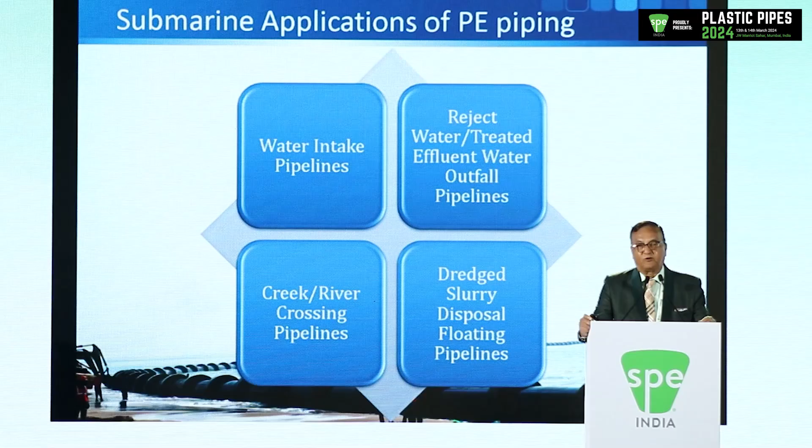Let me begin the presentation. Before we go to the challenges, let us quickly see the applications for which HDPE pipes are popularly used. The most popular application in India is water intake pipelines, mainly for desalination projects, where raw sea water is drawn from the deep sea through a pipe. The second application is reject water and treated effluent pipelines. Reject water is generated from the desalination process, in which about 40% of water is converted to potable water and the rest 60% becomes highly saline water which needs to be disposed of like a treated effluent. Treated effluents from industries, industrial parks, or industrial estates, and outfall pipelines, have been made more or less compulsory for these sectors. So HDPE pipe is very popular for such applications.

I remember in 1985 to 87, when I was working for Polyolefins, we did some demonstrations and held workshops for crossing rivers and creeks in the Kerala region. Everybody knows Kerala is infested with backwaters, so any water supply trunk main traveling through has to cross 2 or 3 water bodies. We had advocated the use of HDPE pipes there for creek crossing and backwater crossing. I'm happy to say that now there are almost 25 such installations where they have avoided construction of a pipeline bridge and instead gone below the creek bed using HDPE pipe.

A very unique application is dredge slurry disposal pipeline. We all know that when a port is developed or in operation, it requires maintenance dredging, where soil from the port area is removed and disposed of in the deep sea. HDPE pipes, being very flexible, elastic and light, serve a very good purpose in dredging operations. They lay about one or two kilometers of HDPE floating pipe to dispose of sand or silt from the port area to the deep sea.

Before we come to the challenges, let us see the overall key requirements of a typical submarine application project. Firstly, we have to see the overall feasibility and go for selection of material. Although in 90% of submarine installations HDPE pipes are used, some applications may not recommend use of HDPE pipe. The most important thing is reconnaissance, survey and assessment of marine conditions and site conditions.

This is the very essential requirement of a submarine project. Third and very important is addressing the local habitat issues. Almost 70% of the pipelines I have done had objections from local habitats, mostly fishermen. They have a common grudge against any pipeline going into the sea, that it will kill the fish and they will lose their livelihood. I have seen projects stalled for more than two or three years because fishermen did not permit the installation. So it is very important that before you start the project, you initiate the client to settle with the local habitat so there are no problems during the installation process.

Pipeline stability arrangement, which I will come to later in the technical section. Near-shore leveling of the intake pipe is also covered later on, and dredging for the pipe trench is also covered later on. Fabrication and assembly of the pipeline is site specific. Not everywhere do we do the pre-assembly of the pipelines, but it is site specific.

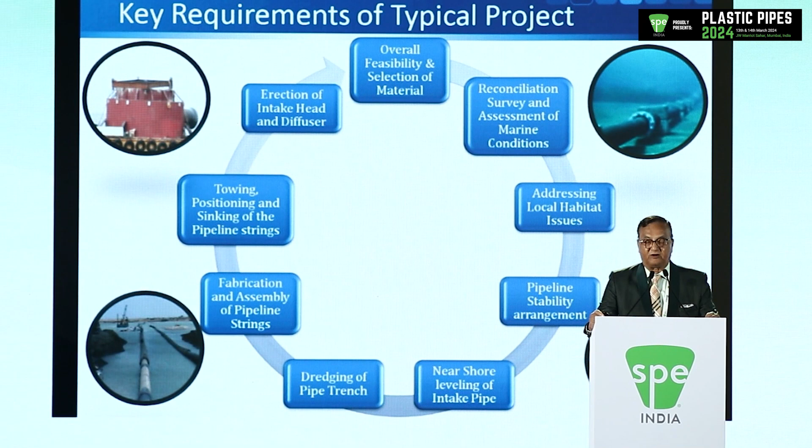For a float and sink method, towing, positioning and sinking of the pipeline is one very important part of the whole process. When we go for seawater intake systems, we have to install a seawater intake head at the end of the pipeline so that sediment-free water can travel into the pipeline. For a reject water or effluent disposal pipeline, there is a diffuser which diffuses the fluid into multiple streams to get proper dilution and dispersion.

Now, we are all here to discuss polyethylene, and I am proud to say more than 90% of submarine installations use HDPE. Why? Because of its specific properties. One is excellent flow characteristics, and added to it, there is high resistance to scaling for HDPE pipes. So for submarine applications where the chances of scaling are very high, HDPE pipes are more suitable.

Resistant to seabed changes. The seabed keeps changing every season, sometimes getting filled with sand, sometimes getting eroded. HDPE pipe can easily adapt to such changes. There is no free spanning of HDPE pipe; its elasticity permits it to change with the seabed very quickly.

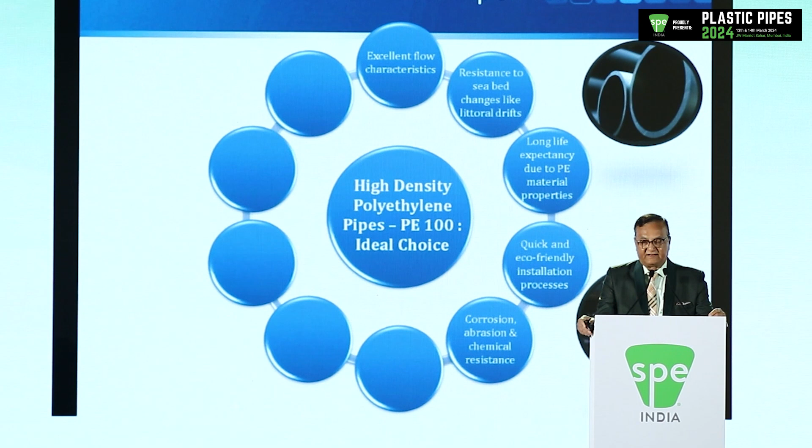Long life expectancy, because PE is immune to seawater corrosion, so it lives its complete life without any hassles. Quick and eco-friendly installations, since it doesn't require too many barges and cranes for installation. Corrosion, abrasion and chemical resistance, as I already mentioned. Life cycle expectancy is normally its designed life of 50 years, because it has no effect from seawater on its material. It gives the lowest unit delivered cost of water because of high flow characteristics.

We have heard the problems of metallic pipes. Mr. Salvi has very elaborately shown, as they say a thousand words for a photograph, and we have seen the photographs of what condition the pipes were in. This doesn't happen with HDPE pipe.

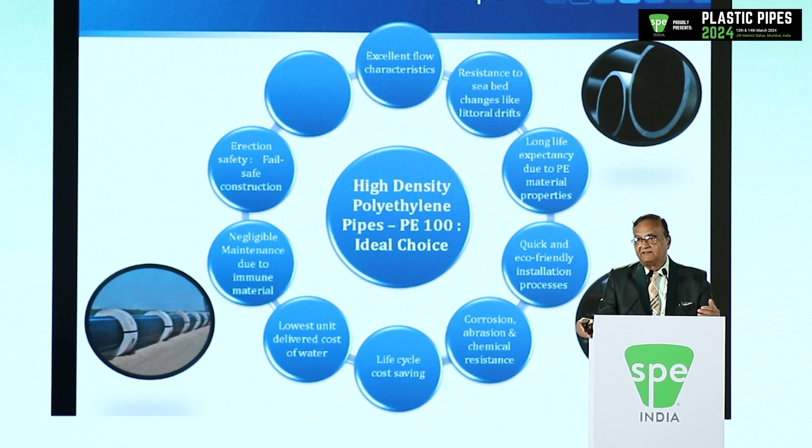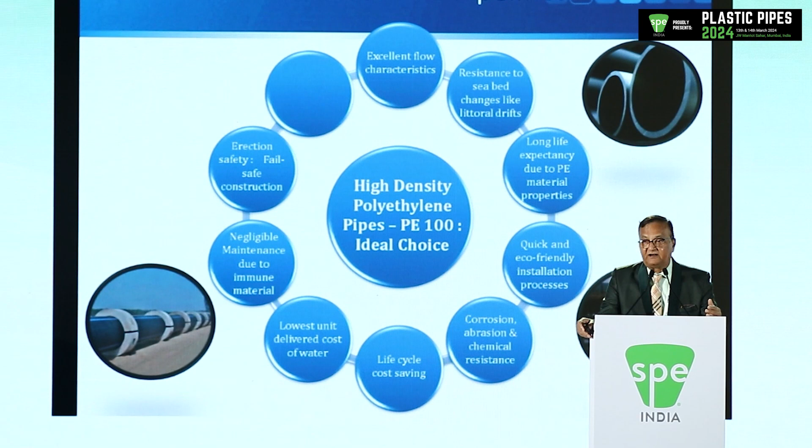The HDPE pipe erection process is fail-safe. I don't have time to explain it in detail, but if something goes wrong, you can always retract, like an army retracts when they think they will lose if they keep fighting. They retract a few steps and fight again. That way, even if there's a problem and you feel the operation should be abandoned, it's possible to retract the pipe and relay it again in the next available tide.

There was a time when this technology was not available in India, but for more than three decades now, we have indigenous construction technology available, and I am part of it. There are a few more agencies who can successfully carry out HDPE pipe submarine installation.

As I said, reconnaissance, survey and assessment of marine conditions is a very important factor, or challenge, before you plan any submarine project. The reconnaissance survey is basically a seabed survey and a seismic survey which classifies the soil on the seabed. That tells you what kind of installation methodology you have to adopt.

If it is a sandy soil, a pure smooth sand soil, then the HDPE pipes have a tendency of self-burial. Even after a couple of years, the pipe will go under the sand and be buried on its own. So in such cases, dredging is not necessary.

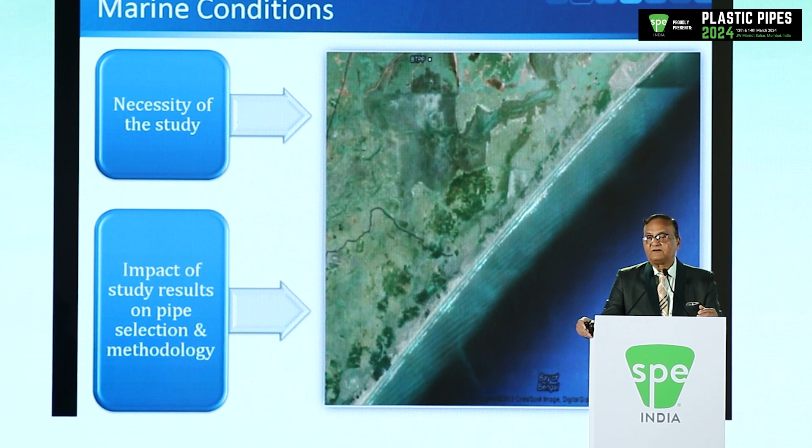But if the seismic analysis shows that it is full of rock, then a different design approach is needed. Either you spend a lot of money dredging the rock, or you ballast the pipeline in such a fashion that it can withstand the sea currents. Based on the impact of these studies, we had to design the piping system and the installation method.

Now I said we will talk about pipeline stability. HDPE pipes are lighter than water, so we need to weigh them down before putting them on the sea floor or under the seabed. For sinking the pipeline to the bed, we need concrete collars. A typical picture is being shown here.

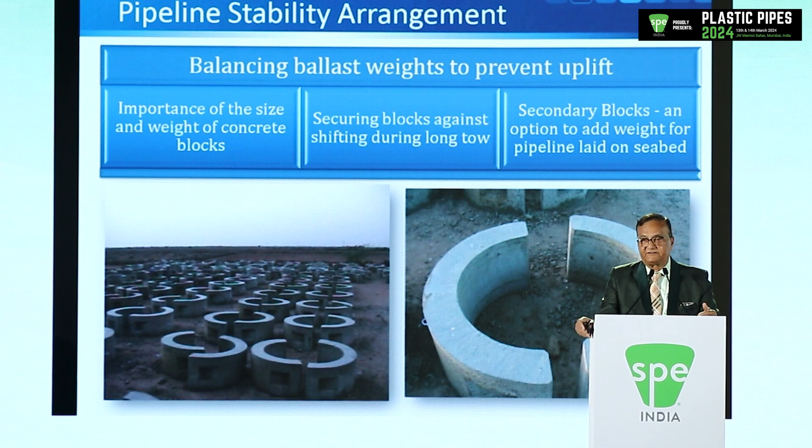They are very firmly bolted, because during the installation process there's a possibility that the blocks will slide and come together, causing an accidental sinking. So it has to be very securely fixed onto the pipeline. As I said, when the pipelines are laid on the sea floor, if required, we have to put secondary weights so that it can withstand the sea currents.

For seawater intake pipelines, the biggest challenge is leveling the pipe on the shore. When it comes near shore, in the intertidal zone, the seawater has to flow from the sea into the seawater pump house on the shore, mostly by gravity. So we have to maintain a gradient in the pipeline so that water can positively flow into the pump house or sump at all times, during all tides, even the astronomically lowest low tide.

The excavation depth goes up to 10 to 12 meters in some cases, where the ground is at a higher level than the sea. Normally it is more than 3 meters always, otherwise it will get merged into the sea. But sometimes it is 5 meters, 7 meters, and then we have to do a very deep excavation in the near shore area so that the pipe can come in at a proper gradient.

For this, you cannot do an open cut excavation of 12-meter depth, because your top width will be around 60 meters or so, and it is not normally permitted by the fishermen because their local, normal movement is affected. So we had to go with a sheet pile enclosure and a sheet pile cofferdam so that the excavation and installation can be done peacefully.

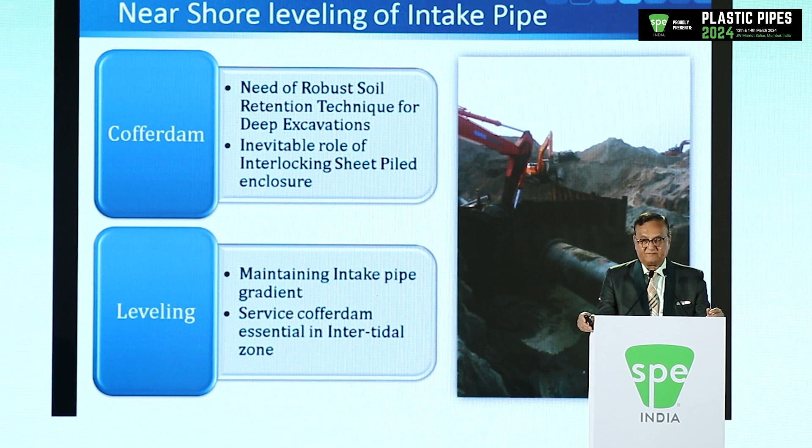Dredging of pipe trench: for many cases, the Environment Ministry is making it compulsory to dredge the trench, because a pipe lying on the surface creates problems with the fishermen's habitat—their nets get tangled and damaged. So based on the seismic analysis of the area, we had to plan whether to go with an excavator-mounted pontoon, a cutter suction dredger, or a grab crane barge. All these method selections are done after the seismic analysis.

Trench bed preparation: actually, HDPE pipe doesn't require trench bed preparation because you don't need to put a bedding or a mattress below the HDPE pipe. It can safely be put on sandy or clay soil.

Now the installation techniques, fabrication and assembly. This is one typical photograph of beach launching of the HDPE pipe for float and sink method. But there are other methods also.

During the initial survey, we had to find out whether there is a clean beach available for fabrication of the pipe string of about 500 to 600 meter length. If that beach is available, then we can go for float and sink method, shown over here. Otherwise, there are possibilities that you can have a port nearby, and that port permits you to fabricate the pipeline in the port, then bring it to the site of installation.

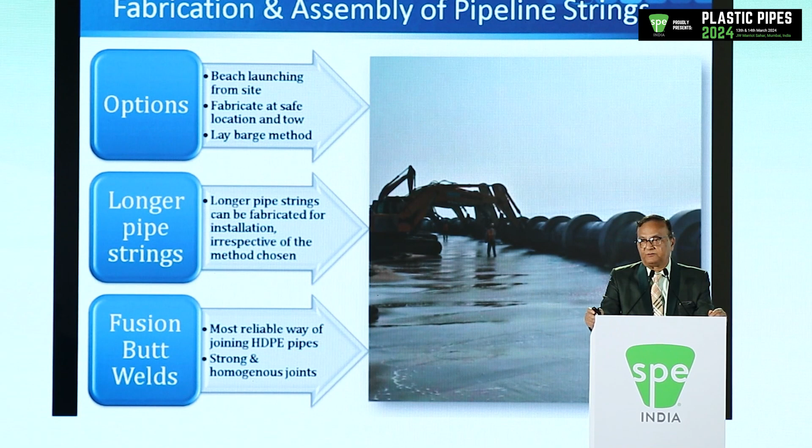If both these things are not possible, we have to go with a lay barge method, where the pipe is welded on the barge itself and then sunk from the barge. We can have longer pipe strings, up to 500, 700 meters, in the beach launching option. The most essential thing there is weld quality, because the pipe undergoes high stresses during beach launching and the welds must withstand it.

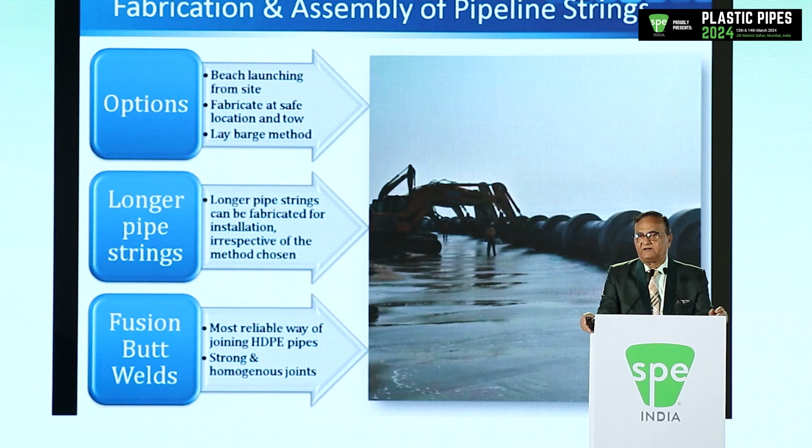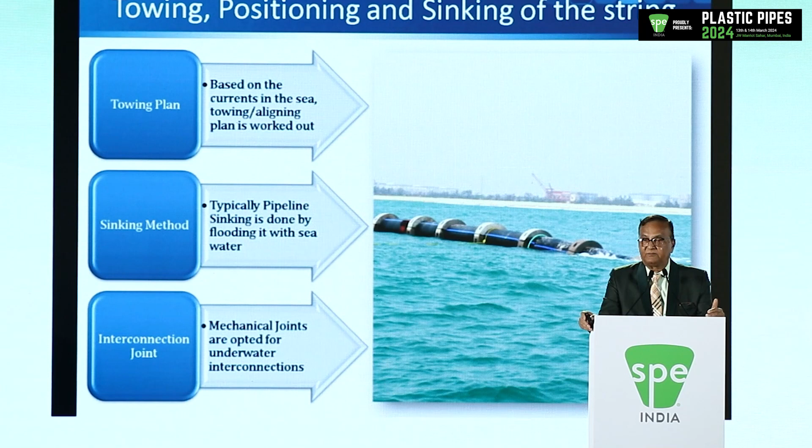The current equipment available is very good in giving sustainable welding. For towing, positioning and sinking of the pipeline in beach launch method, we had to make the towing plan considering the currents in the sea, and sinking is normally done by flooding seawater into the pipe. If you are going for multiple strings, you need to have a mechanical joint in between.

Now to understand how installation is done, I will present you a real-time video. This is from a recent site for Aurobindo group of companies. They are putting up a desalination plant, and we have done seawater intake pipeline for them. For everyone to understand, I will just play the video. It is about 3 minutes. May I request to play the video, please?

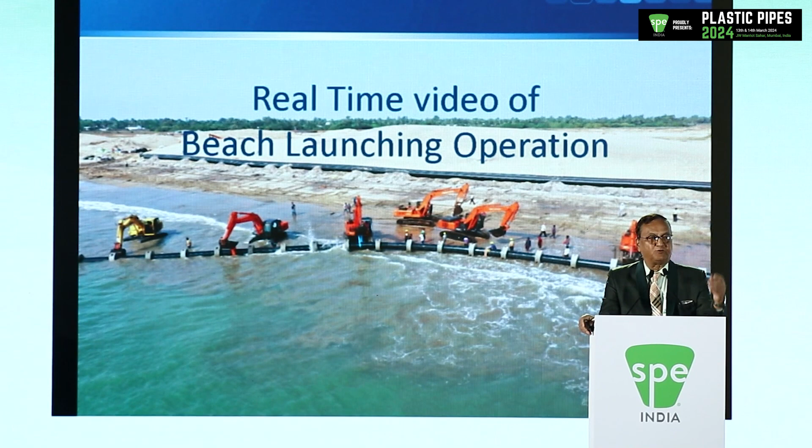This is typical beach launching. Now the pipe is fabricated on the beach. It will be pushed into the sea using this equipment, and as you will see in the next video, there will be a tug which will pull the pipe into the sea.

You can see about 5 excavator cranes pushing the pipe in the water. We use this because it has very quick movement. These machines can move very quickly. Secondly, they can go into about 1 meter water depth, where we need to float the pipeline, so they can go into that depth and put the pipe.

Now this first machine, which has pushed the pipe, that pipe has started floating. So gradually the entire pipe length, this is a 600-meter long string, will be pushed and then floated and taken into the sea. This looks like a simple operation, but this is the biggest challenge of the float and sink method: to synchronize the tug pull and the shore push.

These two things have to synchronize. The shore push cannot push too much, and the tug cannot put the full force unless the pipeline is floating. Now this is the tug which is pulling the pipe into the sea. We have to have a very long rope, almost 300 to 400 meters long, that we have to put.

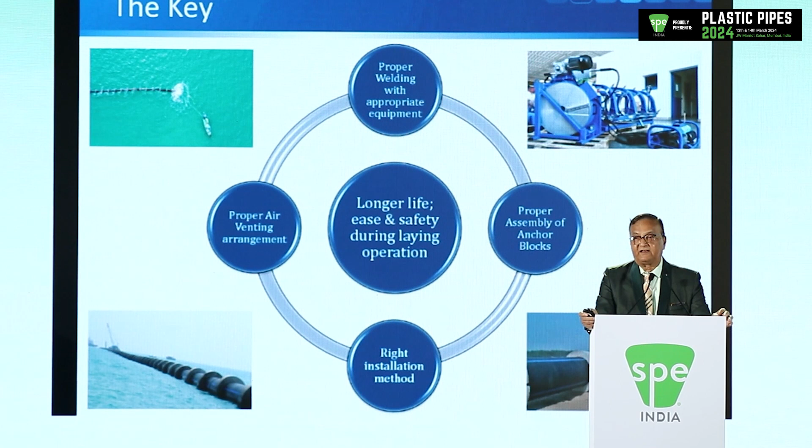Now, what is the key to a successful submarine project? Proper welding, use of state-of-the-art equipment, proper assembly of anchor blocks, right installation method derived after study of the ocean, and proper air venting at the shore. That is very essential.

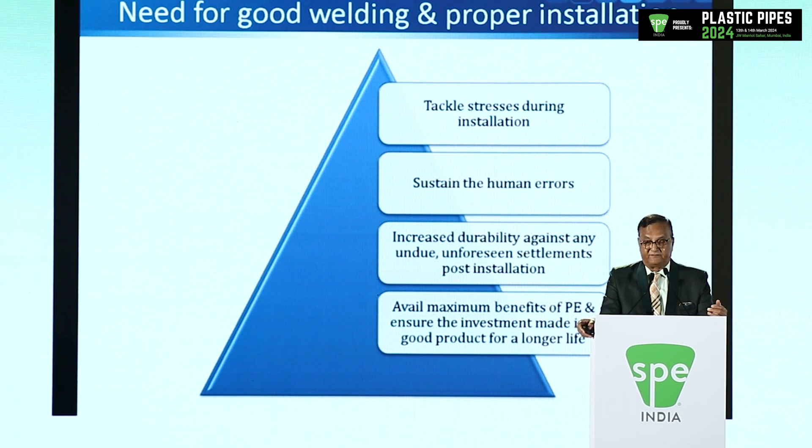Need for good welding - it has to tackle a lot of stresses. The welding should be such that it should sustain some human error if it happens, increase durability, and allow the client to avail the maximum benefits of polyethylene, which we proclaim.

I'll come to the key projects which we had done. 1200 mm into 3 pipelines for Nuclear Power Corporation. It's something new Nuclear Power Corporation has done - for the first time, they have gone with a piped water intake system.

This is from a river. Otherwise, they always go with open channels, Nuclear Power Corporations. Many power plants are there, and most of them are with open channels. But for the first time they have gone with piped, after a lot of convincing and a lot of marketing.

We have done a very long offshore pipeline, 1000 mm by 7100 meters, into the Arabian Sea at Nawapur coast. Friends, this happens to be the longest HDPE submarine pipeline laid in this country. Then we had done a 1600 mm diameter pipeline, which was at that time the largest diameter manufactured in our country.

We had done the Minjur desalination plant, and we had done some fast track projects. Only because it was HDPE could we do fast track projects. I will come to that.

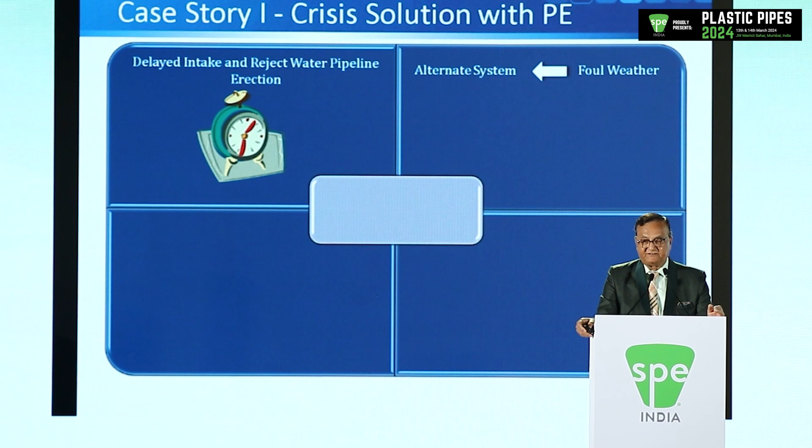So this is one of the fast track projects - this project is at Minjur. Their installation of the seawater intake pipeline, main seawater intake pipeline, was delayed for some administrative reasons. We were called upon, and it was foul weather - it was August-September month, which is foul weather in the Bay of Bengal.

So we said that we can lay 5 smaller pipelines, not 1 big pipeline, in the given time frame of 60 days. So we suggested 560 mm into 5 lines.

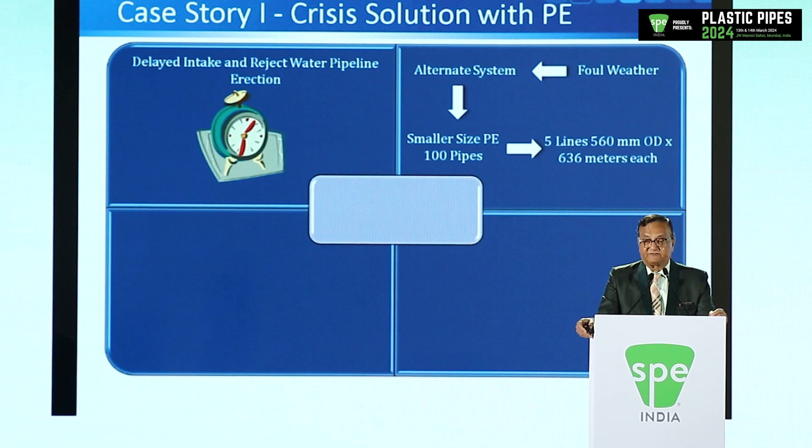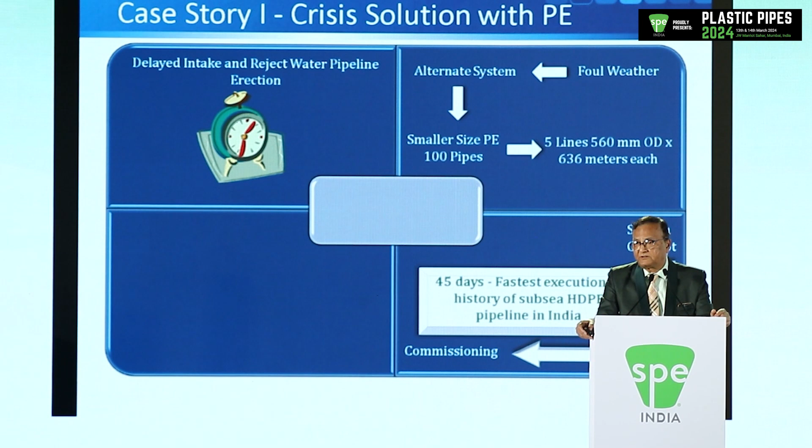System concept to commissioning was done in just 45 days. 5 lines of 636 meters each were laid in just 45 days. This was possible only because of HDPE pipes - no other pipe can be installed so fast.

And then when the foul weather receded, subsequently we also laid the 1600 mm diameter pipelines for intake and outfall. The plant has been commissioned and is operating, supplying 100 MLD water to Chennai.

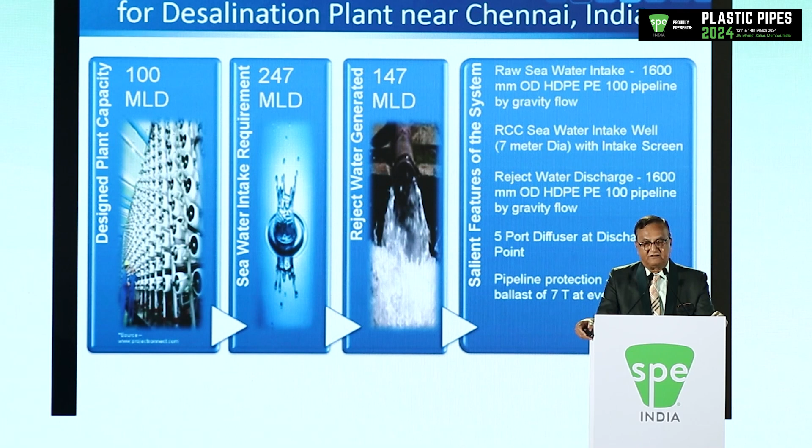This is the same case story, 1600 mm diameter pipeline for intake and 1600 mm for outfall, which was done in the fair weather season.

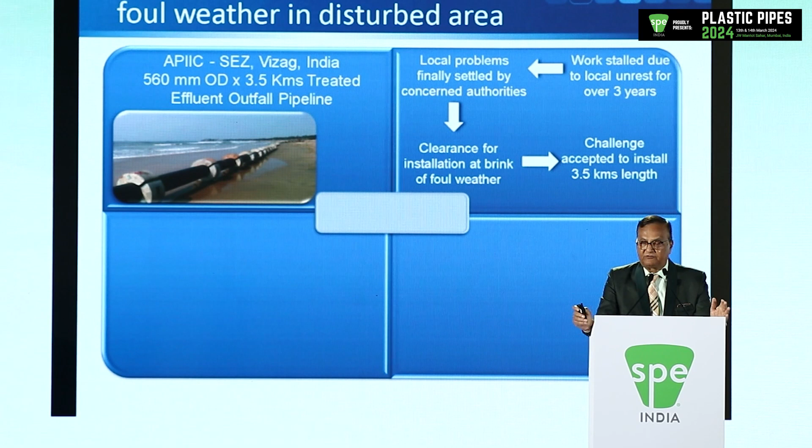This is the project where I said there was a local habitat problem. This project was held up for 3 years. We were not allowed to work by the fishermen, and they could get to violence also in that. So we couldn't venture onto the thing.

But finally they settled with the habitat, and we got the clearance at the beginning of March, which is the beginning of the foul weather.

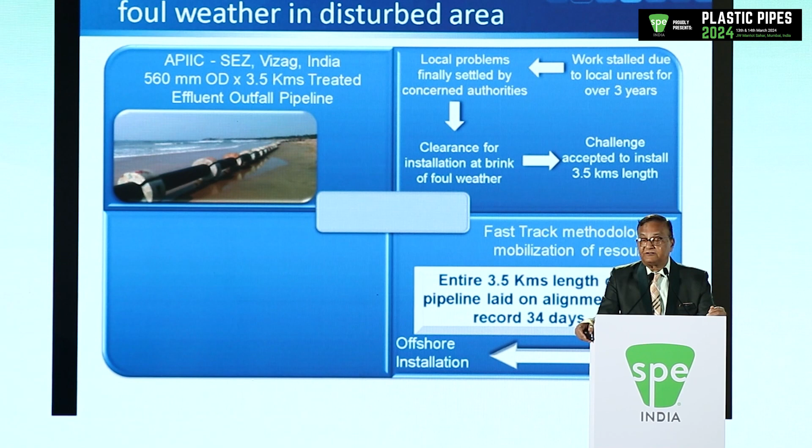We had the confidence of the previous fast track project, and we knew that HDPE pipe could be done in this timeframe. This was a 3.5 kilometer long pipeline, and we had done it in a record time of just 34 days. Of course, our preparations were ready because they were done outside, but on-site fabrication, towing, aligning and sinking was done in just 34 days.

This is probably the fastest track project done in our country. Laying a 3.5 kilometer length in 34 days is a Herculean task.

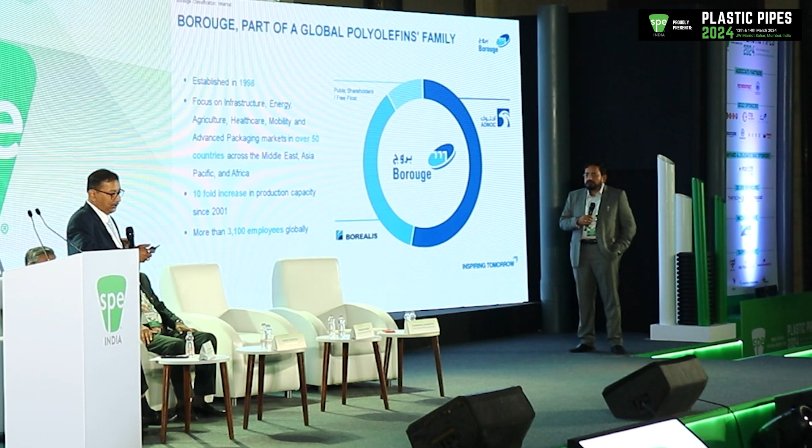Borouge is a leading petrochemical company, as most of you may be knowing, which provides innovative and differentiated polyolefin solutions, established in 1998. Pipe is one of our product lines, but we also focus on energy - that is wire and cable, agriculture, healthcare, mobility, and advanced packaging - in over 50 countries across Middle East, Asia Pacific, and Africa. There's been a tenfold increase in production capacity since 2001. Currently it's 50 lakh tons of polymers in one single location, going to be increased to 64 lakh tons by 2027, and we have more than 3,100 employees globally.

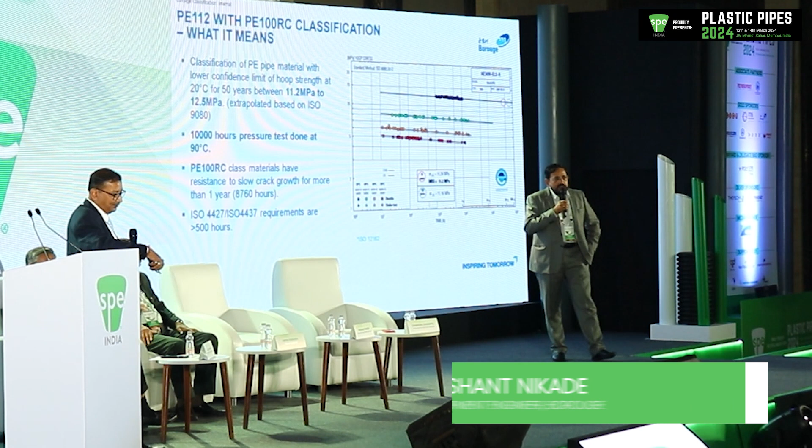Now, again coming back to Sholay - you know, it was another movie where the hero is asking his brother, who is an underworld don while the brother is a policeman: 'I have a bungalow, I have a car, I have a bank balance, what do you have?' So I often ask Prashant: the industry has PE63, PE80, PE100 - what new do you have? And what Prashant says is this: I have MRS 11.2 material. So this was the story we started, moving from 1960 to 2020. It was a PE100, and we have a PE100 stress crack resistance material, and then we have RC, and then we also have MRS 11.2 material. So things are moving, and when we say MRS, what exactly does it mean?

So the people from the industry, Nisha covered that topic, but let me explain. When you classify, it's not like within 1 month the exercise will be done. It's a 10,000 hour test, 132 samples of 32mm tested at various stress levels and temperatures, and then you have a regression graph, which we call the MRS graph. It's not easy - failures honestly happen, and as Nisha said last time, at the last moment it will fail sometime.

What we can see here is a classification where the top is at 20 degrees centigrade, but earlier it was done at 65 and 80 degrees. Here we can see that for the 50 years life, which is a requirement of ISO 9080, we are talking about 11.2 to 12.5 extrapolated based on this. But you can also see that we are talking about 100 years very comfortably - if you see these points, we are talking about 100 years.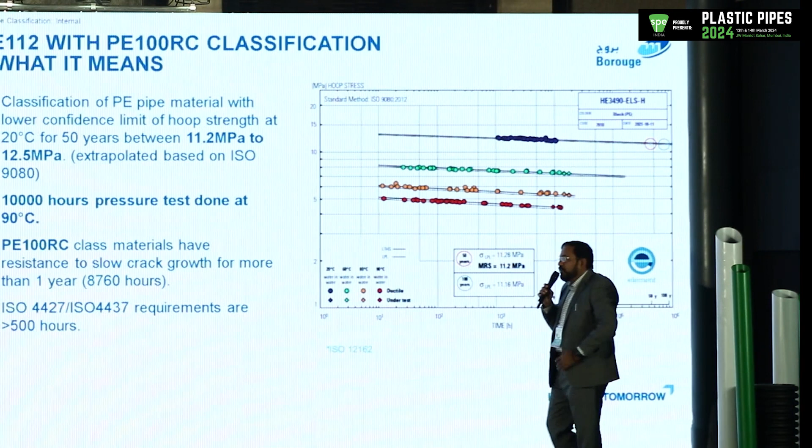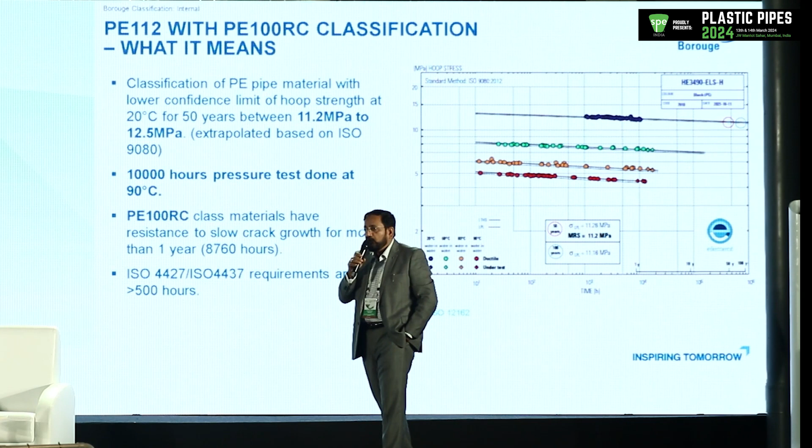So it's wonderful that we are not just talking about the topic of the presentation. The theme was sustainability - we are going over and above, talking about 100 years of life. So for the next generation, we are probably giving a better, far superior material.

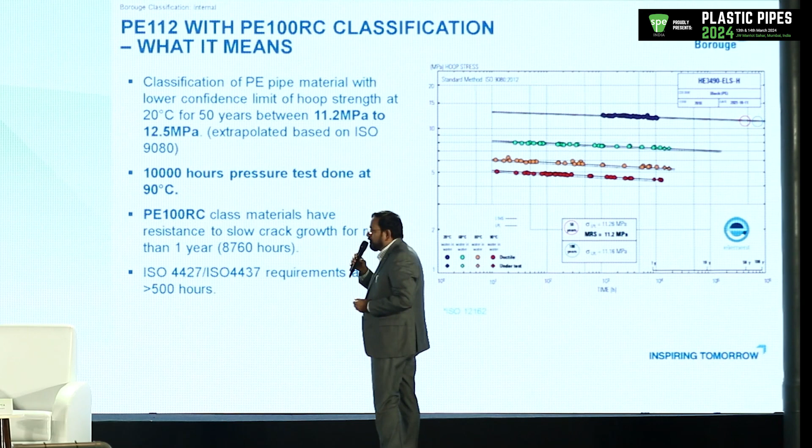There is also a requirement in 9080 that the material should not break - there should be no early failure. Apart from the long term, there should be no failure after 5,000 hours at 80 degrees. So we raised the bar, and as Nisha said last time, the complete properties have been lifted. We are talking about 90 degree centigrade, not 80, for 10,000 hours. So much better is the classification, better material.

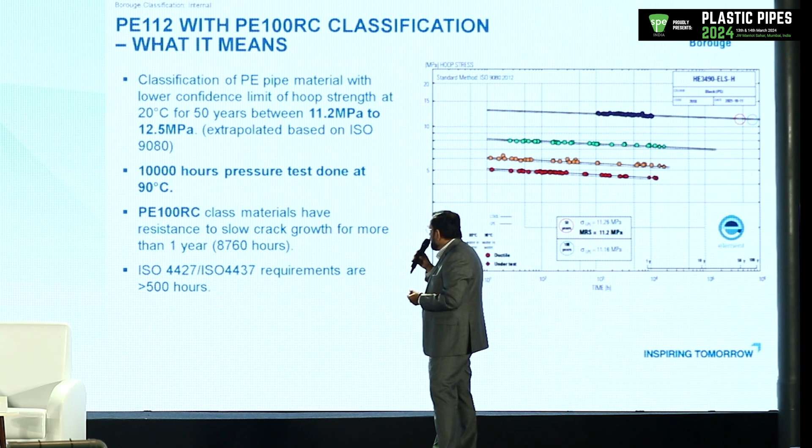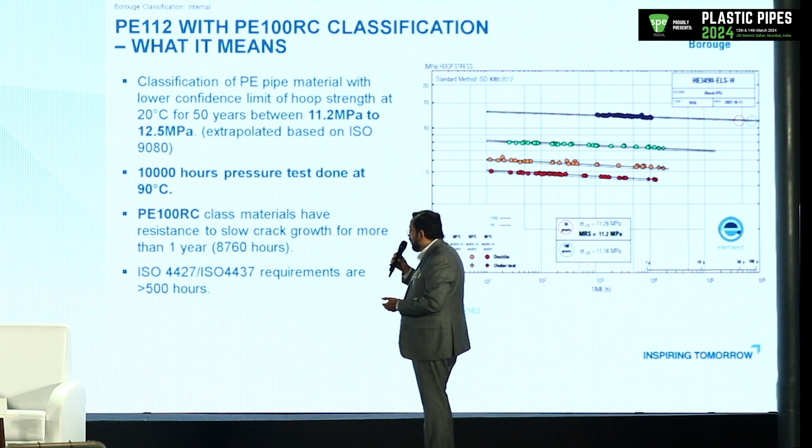Then we have RC, that is resistance to cracking. Now we have seen the installation practices, we have seen a video, you must be imagining what stress levels the pipe will have gone through. So these are the things, and we are even talking about slow crack growth of 8,760 hours, a complete 1 year. ISO 4427 and ISO 4437 requirements are 500, but we are exceeding that.

Next slide - is it only the raw material and testing? No, the standards are also getting aligned internationally. The Indian standard has been raised because Jain Irrigation started producing pipes at 2,500mm, so the Indian standard also increased its range from 1,600. We have gone to 2,500, and ISO 4427 had gone to 3,000.

To accommodate this kind of bigger, larger pipe production, you need a material - so you need a change in the MFR range. From 0.2, it had come down to 0.15. This is not done only in ISO, but also in the Indian standard.

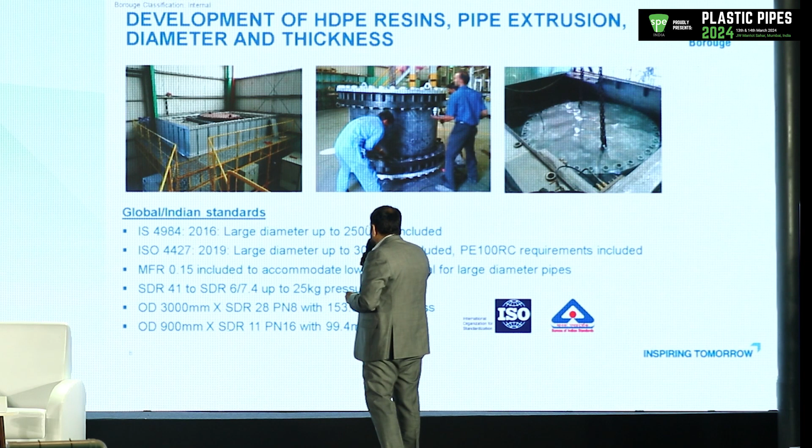So then we have pipes talking about 25 kg. People used to say plastic pipe can't go beyond 8 or 10 kg or 16 kg - now we are talking about 25 kg pressure applications. Just to give you an idea, when you talk of thicker pipes, a 3000mm SDR 28 PN8 pipe has a thickness of 153mm. People talk about 160mm or 140mm diameter pipe - now we are talking about 160mm thick pipe. Even a 900mm SDR11 PN16 pipe will have a thickness of around 100mm.

So the things need to be robust, practical, and have to deliver to the industry. As long as we are talking of material development going to higher pressure or a bigger property triangle, the challenge to sales and technical people is how we can convert it to good applications for the industry, how we can use this property to save money for the customer. So our presentation will be mostly focused on these applications and how to put these properties into good use to make more shared value.

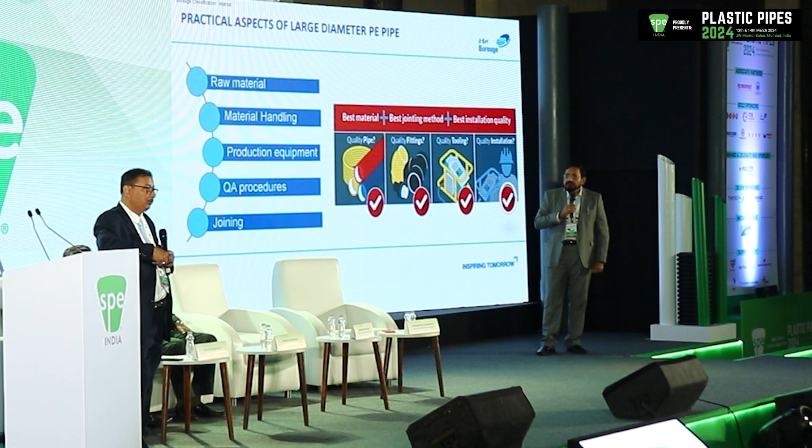So we'll be talking on breaking the limits of large diameter thick walled pipe. A good material is not enough - with a good material you can still make a bad pipe. A good pipe, you can spoil by bad welding. And with bad installation, you can destroy everything. So Prashant will further elaborate on this.

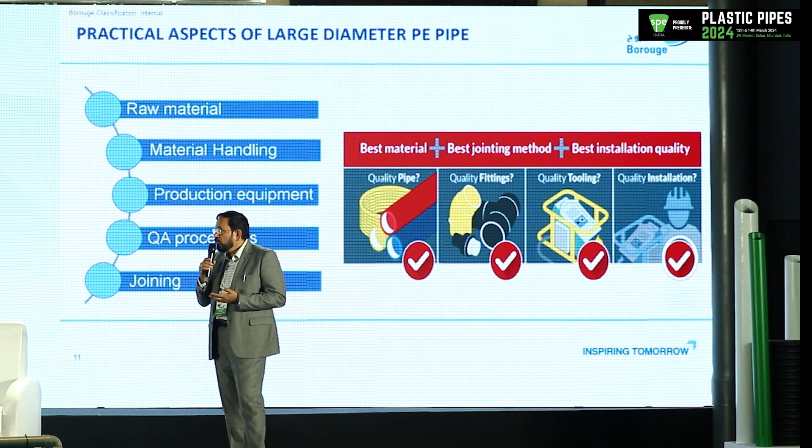When you talk about large pipe, is it only about production? No, it goes beyond that. When you talk about large diameter pipes, we have to consider the raw material - we need a very big material handling system. People are talking about 2,500 kg to 3,000 kg output machines per hour, so the material has to be handled in a far bigger way. Then we need better production equipment.

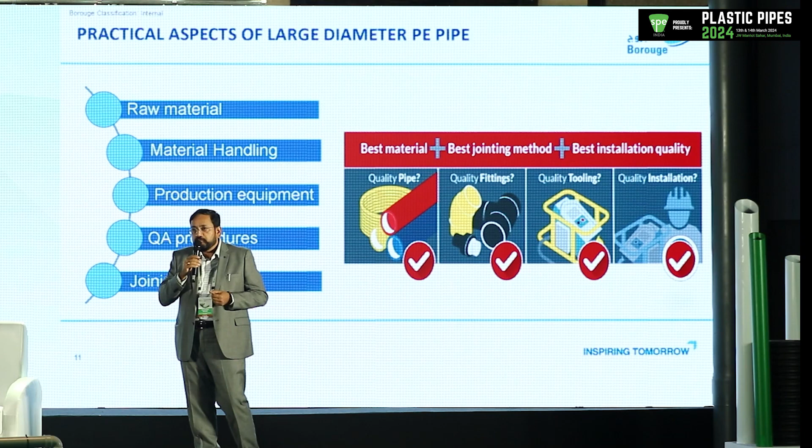One can imagine if it's a 3-meter pipe, you'll probably need a lot of ladders to move around and inspect things - the quality assurance process needs bigger facilities. Because a 3-meter diameter pipe, when you put it into the hot water test bath to test samples, it will be running around - you can just imagine. Then the joining is also critical. So you need the best material quality so it can produce a quality pipe, the best joining methods, best quality fittings, quality tooling, and of course quality installation.

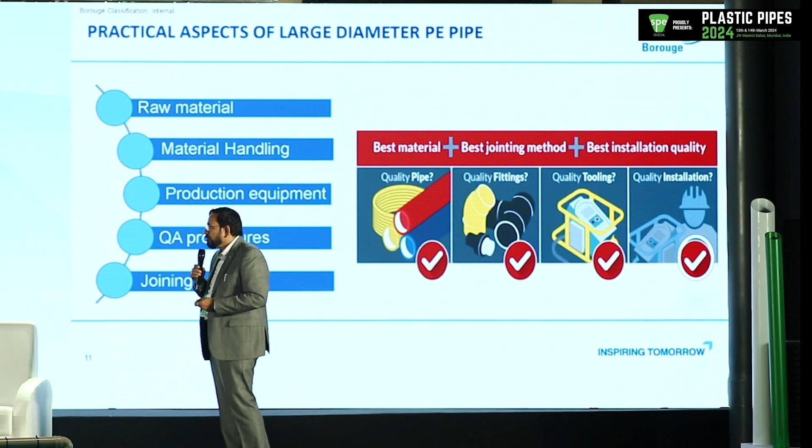The maximum wall thickness that pipe material can be produced with depends on pipe SDR, because the lower the SDR, the thicker it is. Higher the pipe SDR - SDR means diameter divided by the thickness. If it's like a 110 diameter pipe and you say SDR 11, divide by 11 and that gives the thickness. Then we have material properties.

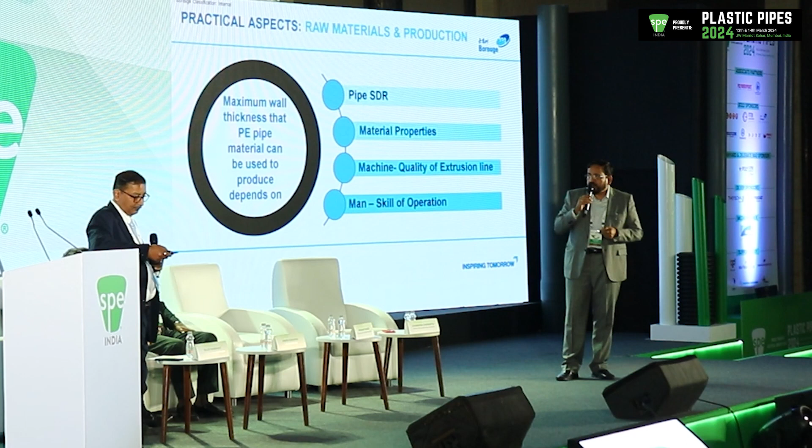There's viscosity, and lots of other things which Nisha has covered. Then the machine quality - how the extrusion quality is, how the machine is set up - and of course the human factor, which is the skill of operation.

When you talk about joining, as things get bigger and bigger, naturally the equipment also has to get bigger. If you want to weld a 2,500 mm pipe, you'll need a machine that can take that kind of pipe. So butt fusion continues to be the favorite for large diameter - people are not going with other technologies. It's a time-proven technology, and the standardized fusion process as per ASTM and DVS standards is permitted. One has to look at joint integrity, flow stream security, and job site efficiency.

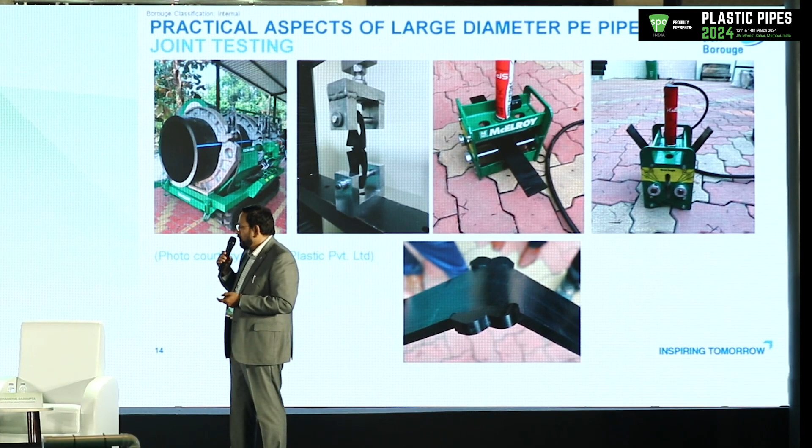Is this only the theoretical part we're talking about? No - this is actual testing. One can see the tensile test photos - the first picture is a 900 mm welding machine. The second picture shows a thick pipe that was cut to see the weld quality through tensile testing. Then we do side strip testing - you cut the pipe, bend the strip, and examine it. You can see such a thick pipe, but the weld integrity is visible. You can see here - it's a clean surface, absolutely clean surface. So it's not just about having good resin, you have to go the last mile and ensure the welding and integrity of the pipe.

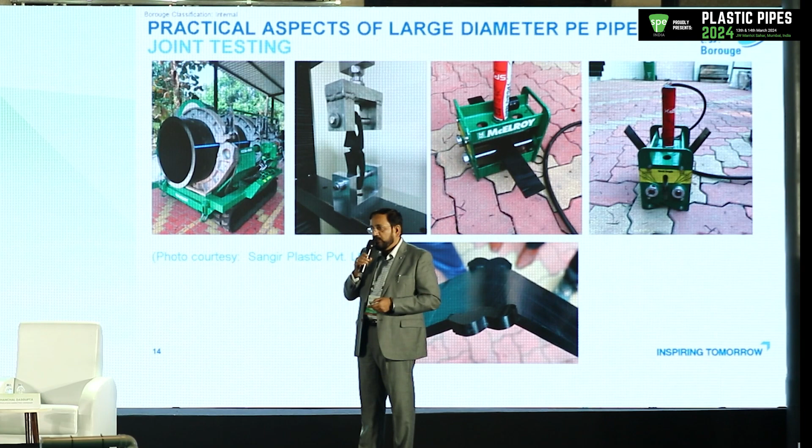Now we'll talk about cost savings with better low sag performance. No innovation is fruitful unless it saves cost. So when we talk about that, what is sagging? I'd request Prashant to explain.

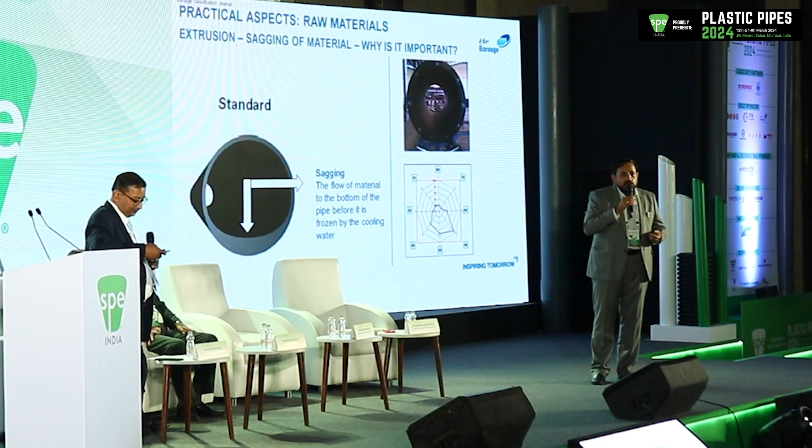Sagging - we've seen that when you run bigger, thick pipe, the line speed is low, or you have a mid-size pipe with thickness variation, the material gets a chance to sag at the bottom naturally due to gravity. This is a perennial problem with piping material, and you can see in the picture that with normal machines it's very difficult to get uniform thickness. You may wonder, if it's not uniform, what happens? Because you can't maintain the minimum and maximum thickness within tolerance, it's subsequently not possible to weld the pipe at the site. So uniform thickness is very, very important - that's the sagging problem.

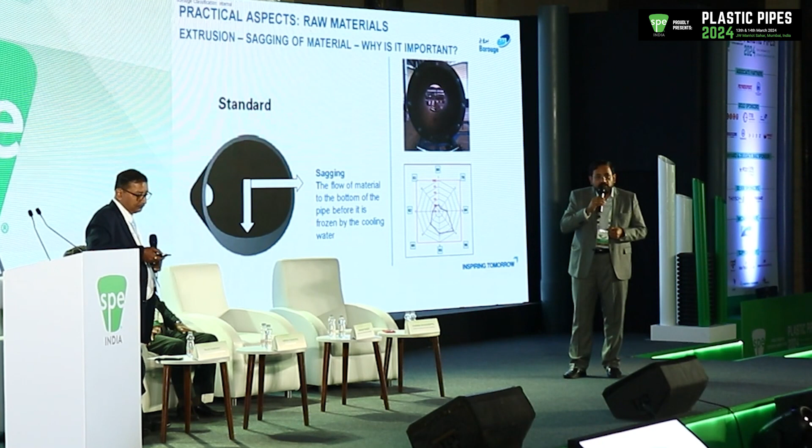So it has to be, this is the most top priority, because your pipe will get rejected if you are not able to maintain it.

Then look at these phases. If you have like an SDR 41 to 26, you will always have a happy phase. Your production machine will be capable, your existing material will be able to deliver that kind of thing, it is possible to produce pipe. But once you bring down from 41 to 21, probably a few sizes you will have restrictions. And if you go from SDR 41 to 17, you are coming down, reducing your pipe size capability.

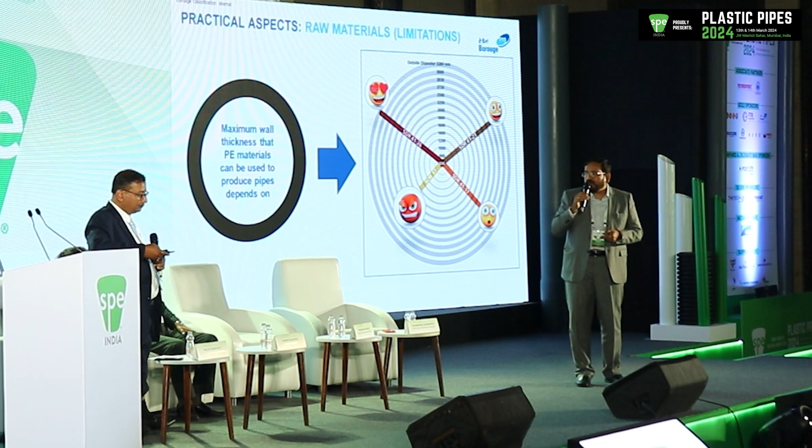And if you're really going for a thick pipe, say like an SDR 11 and 9, you start crying, because the machine which was capable of producing a 3000 pipe diameter has now come down to almost 1600. So it's deteriorating, the graph goes down and down. So that's the importance of the wall thickness and capability.

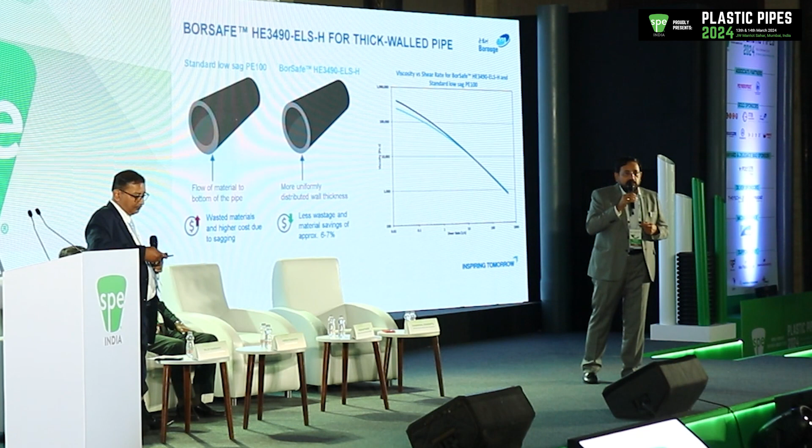Because of the sagging property, one can see very easily what is important is that you save the material, almost like 6-7%. People will say, no, that is not only by the wall thickness. But who will consider the rejections?

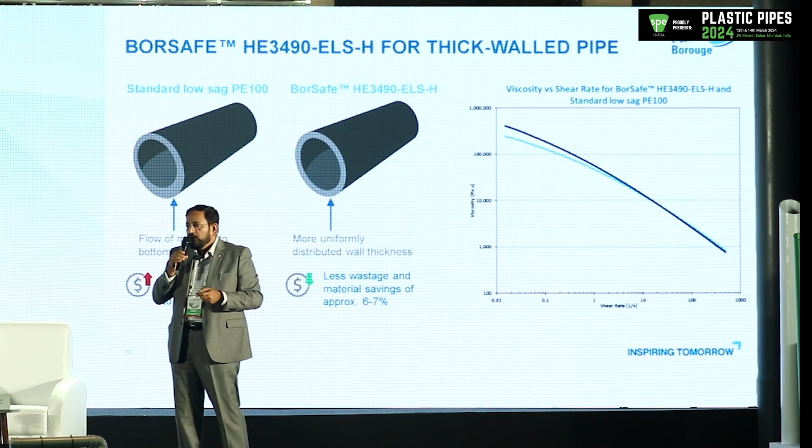The people who are producing the larger diameter will tell you, either you produce a 9-meter pipe or this pipe, then check the wall thickness, then again make the settings. Again probably you may take a 12-meter pipe, then again change the thicknesses. If you do 3-4 iterations, you will come to know that already you have produced a 50-meter pipe.

And if you look at it, it will run into 10-20 tons. So that's the cost of rejections and the cost of time it will take. So it is very important.

Here is an example. If you are not able to maintain thickness, this will happen. But if you use good quality material in probably the same machine, this is what you can achieve.

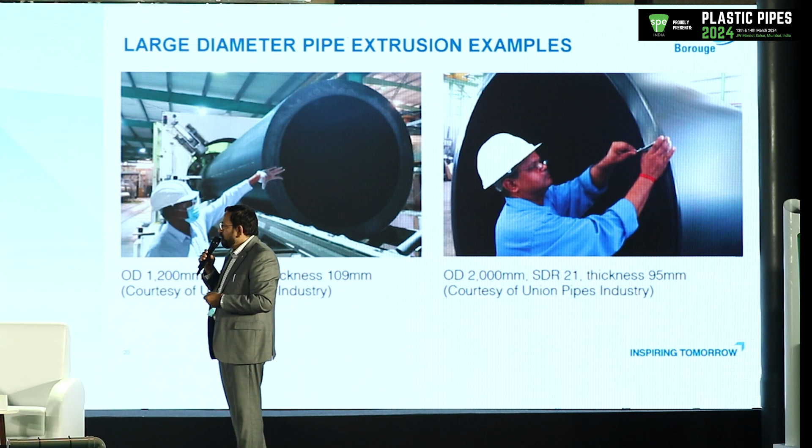So here are some examples: 1200 SDR 11, thickness is 109. 2000 pipe with SDR 21, where the thickness is 95. Then we have like a 1600 SDR 17, thickness around 95 to 100, and DN 800, SDR 11, thickness is 73. So the things are moving.

So now we come to how longer life and withstanding severe installation techniques are possible with high stress crack resistance.

Now there are several tests to evaluate what is the resistance to high stress crack. And every year there are newer tests being invented, because people want the material which fails in the longest time to make it fail in the shortest time. So the most severe, most accelerated tests are being developed.

Here are some of the very critical tests which Prashant will tell you. So how do we do the testing? Because notch is the first property - if you have a notching of the pipe, that's the first chance the pipe may get failed. So one is related to accelerated notch test, which is known as ANPT.

Then we have an FNCT test, which is a full notched creep test. Strain hardening, because we can take out some dumbbell and then test it, how it fails. So essentially, then we also look for the round bar, then we talk about the square bar. So what we do is the notching, and then put it in the solutions and try to see whether it's failing. So these are the long RC kind of new things which have been incorporated.

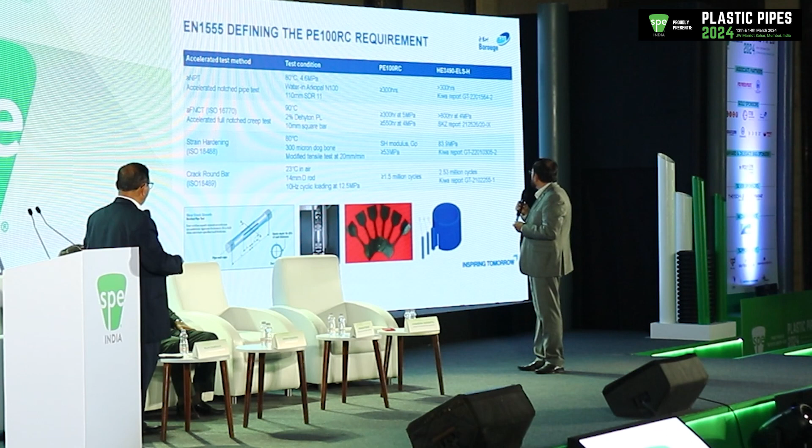It's now like Chanchal, it's like a hurdle test. You first take the MRS, then you move to the hydraulic test, other things. Then you have NPT, then you have RCP, then you have all these tests. These are like hurdles. Then you have point load test, point load test and all those things. So things are different and move.

So now we come to longer life with higher abrasion resistance and how that can give you cost saving and economic advantage. We have benchmarked these materials also for abrasion resistance because abrasion resistance increases with molecular weight. Higher molecular weight gives better abrasion resistance, and also longer side chain branches give more entanglement.

So we have done abrasion resistance tests as per ASTM D4060 using both C10 and C17 abrasion wheels. They perform a specific number of rotations, maybe 5,000 or 10,000 cycles, and then see how much material has been abraded out of the specimen.

So as you can see here, we have tested our PE100 material, which is the industry benchmark, 3490 LS, that is a standard PE100, along with this new material and a competitor material. And you can see the loss due to abrasion is minimum here for both C17 and C10 wheels.

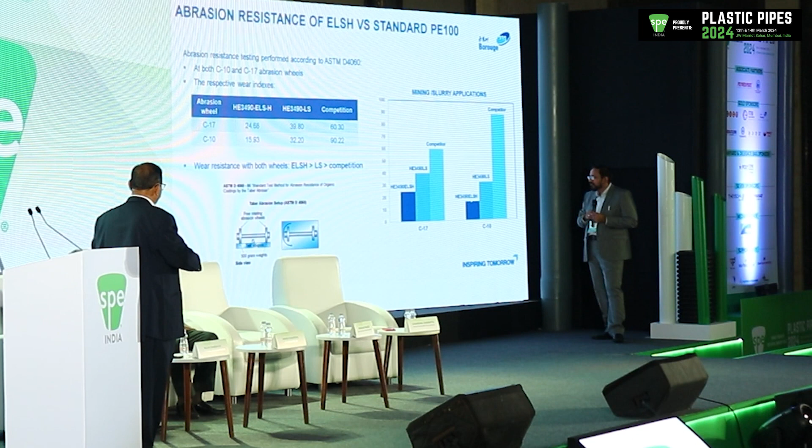This means that under abrasive applications of conveying very abrasive fluids, etc., these materials will last much longer, and you can use probably lower thickness or give more life with the same thickness. So Prashant will present you a case study like this.

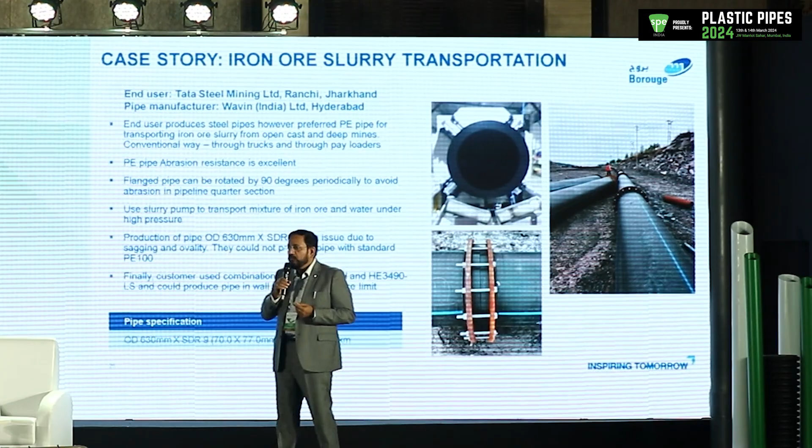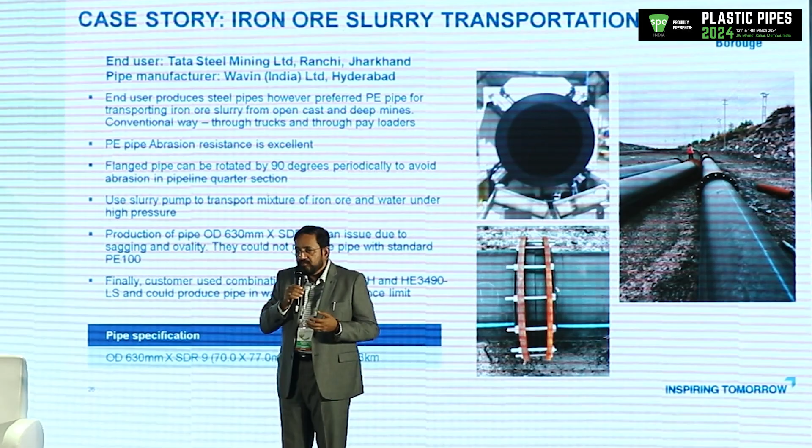So when we do the abrasion test, where does it apply? Everybody knows that in slurry transportation, where there is a solution of solid and liquid passing through, especially in mining operations, sand silting, dredging - all these materials will abrade the pipes.

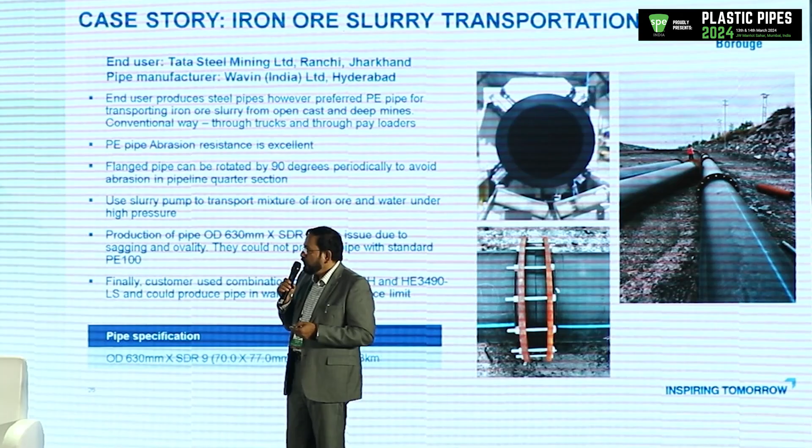So I'm presenting a case where Tata Steel does a lot of slurry transportation, and one can see these pipes have been used. It's like a 630 SDR9 pipe - not SDR21 or something, this is SDR9. And this is where the pipes are rotated.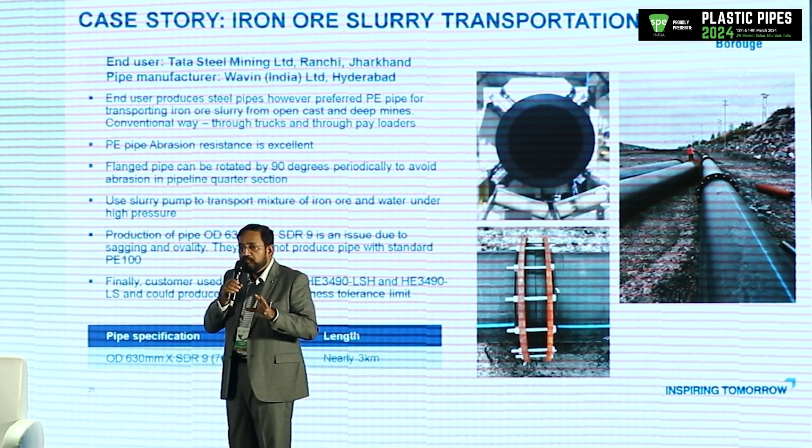They are flange jointed. They are moved depending on the site. Where the site is moving, they will move the pipes - that's why they are flanged, not in one line. Then they start rotating the pipes, say 90 degrees. After some time, they rotate to 180, then 270, and probably back, so that you don't abrade just one section.

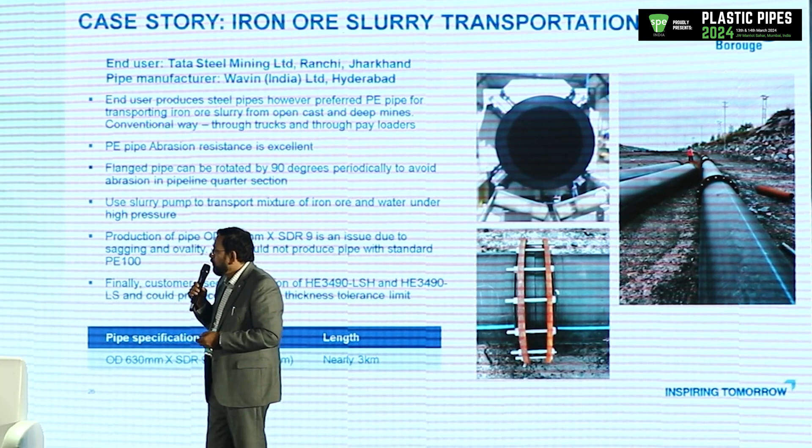So they keep on rotating to distribute the abrasion. Instead of having a life of 4 years, you can achieve at least 3 times that, 12 years. So this is an excellent material, and this property can be very useful for this kind of application.

Now coming to reducing pipe thickness with higher MRS material. This is the most often asked question - yes, you have made PE112, but you don't have a table in the standard corresponding to dimensions of PE112. So how can you do the cost saving by down-gauging and things like that.

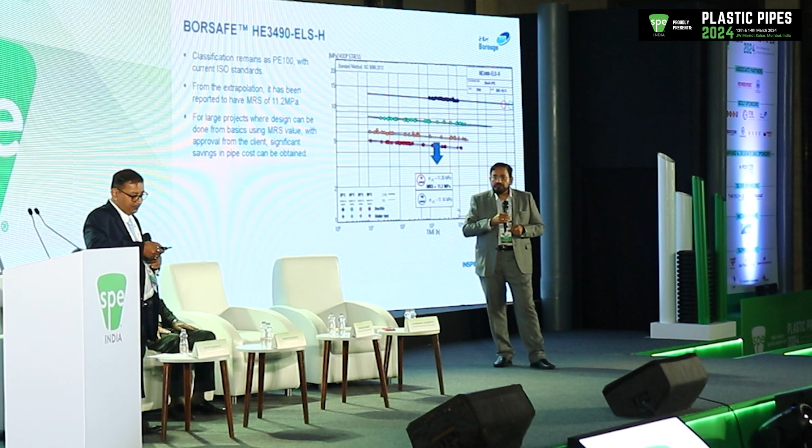For large projects where design can be done from the basics using the MRS value with approval from the client, there are significant savings in pipe cost. And we have done some calculation which Prashant will present in the next two slides.

The wall thickness is always calculated by the very simple formula: P into D divided by 2 sigma plus P. That sigma value is the MRS value at the bottom. So if you increase the sigma value, naturally the wall thickness will go down without compromising on the 50 years or 100 years of life.

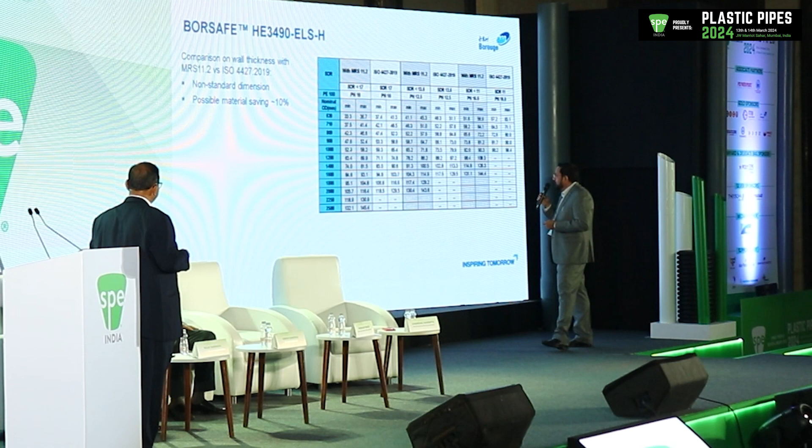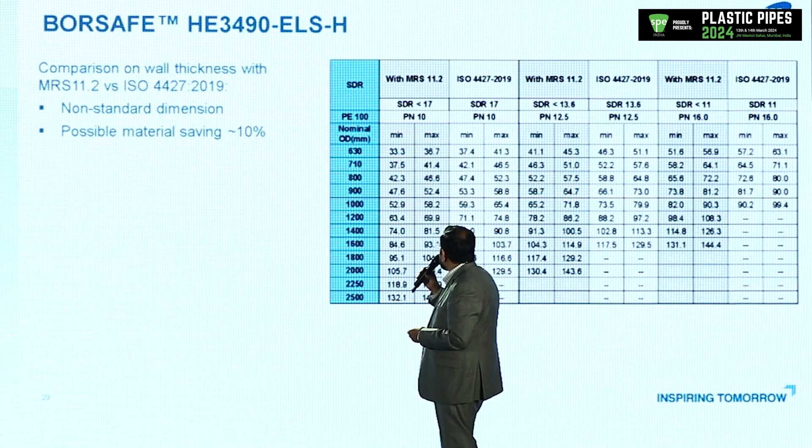So what we try to show you is that if you use a higher MRS material, that is 11.2, you can reduce the wall thickness. If you talk about the 1000 mm pipe, it is 59.3, you can come down to 52.9. So that's the advantage you can achieve.

So many times the customers do not want to pay extra if they feel the material is an assured material and it can be certified through MRS. Why don't you use this and translate it into weight saving of the pipeline?

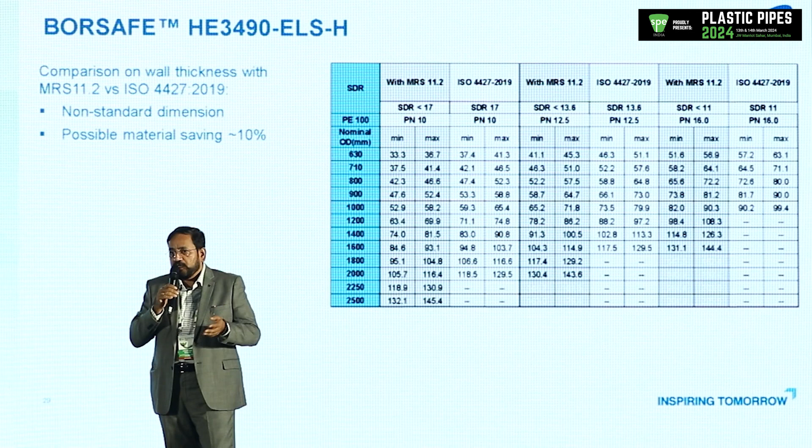And there is another way of looking at it. Sometimes people say no, I want the same wall thickness SDR, I do not want to reduce the wall thickness. Then what happens is, these are all for industrial applications, and in industrial applications, the safety factors are very important.

If you talk about sulfuric acid transportation, or vegetable oil transportation somewhere, they always talk about what's the safety factor. Normally for water, we take a 1.25 factor of safety, but a lot of people need a higher factor of safety.

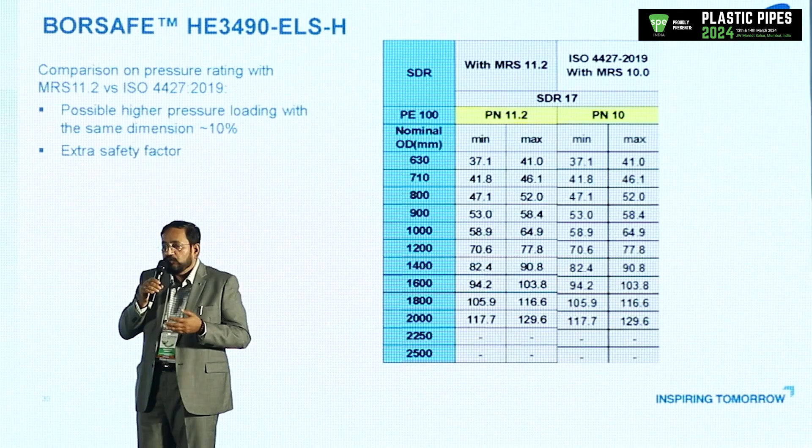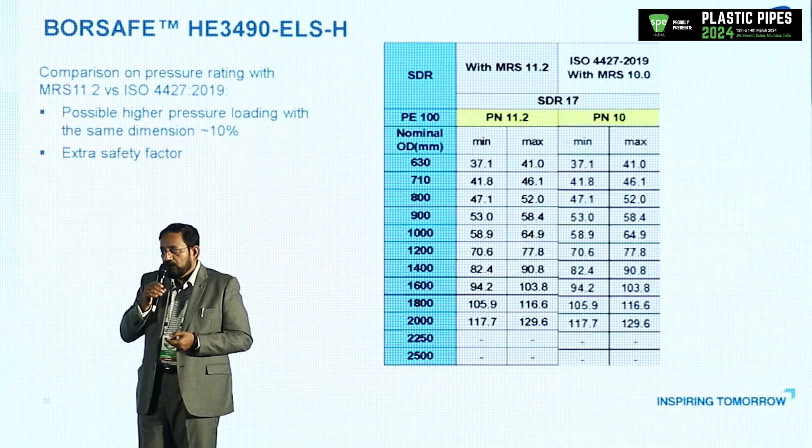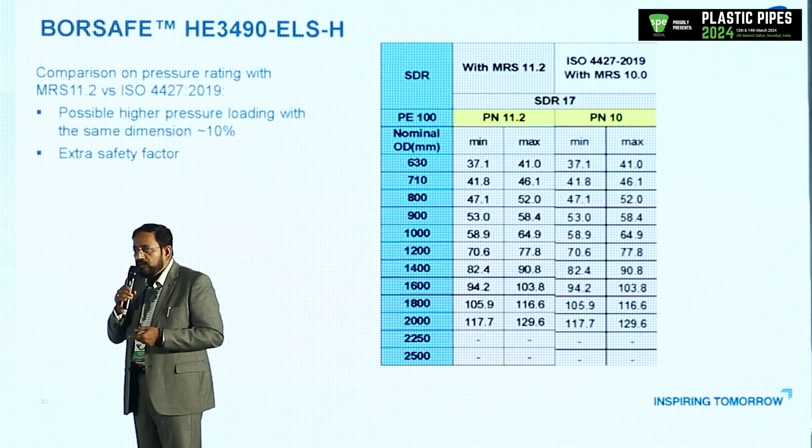They feel there should be some security. If you go with the same wall thickness, you can see very clearly, instead of 10 kg, you can talk about 11.2 kg. So there is an incremental 10 to 15% pressure class increment, giving you a little more factor of safety. Instead of 1.25, you can have a little higher margin, and this is at the lower confidence level. Or you can even do less pressure derating because the pressure resistance is already high. So these are tailor-made situations, and depending on the industrial customers, we can take a call on that.

Now we'll summarize what we discussed so far. Before that, we'll show you some trend-setting projects in the Middle East and India region.

Some of the good projects like Borouge, Abu Dhabi, where we ourselves installed a lot of these large diameter pipes. We had to really convince the EPC consultant because they did not believe in HDPE pipe, but we had the confidence that these materials can replace GRP or other pipes which had been used in the Borouge 1 project, and we had several failures there. In any petrochemical complex, one failure of the cooling water pipeline means several days of production loss, which means a lot of money. So the EPC consultant agreed, and they installed 4 into 2.8 kilometer intake pipes and 6 into 2.3 kilometers of outfall pipes of 1600 diameter.

Then we had an excellent project with ZADCO, a submarine water disposal project, an oil-water mixture from an island to offshore. This is 560 millimeter diameter and 80 millimeter wall thickness, SDR7, used for 25 bar pressure in Abu Dhabi. As Samudra Sahib has already told, a couple of years before he supplied to a nuclear power project, and recently the Kakrapar nuclear power project, where HDPE materials have been used for their passive screen intake with air backwash system, where pipes up to 900 millimeter diameter have been used. It has also been used for the Barakah nuclear power project in Abu Dhabi.

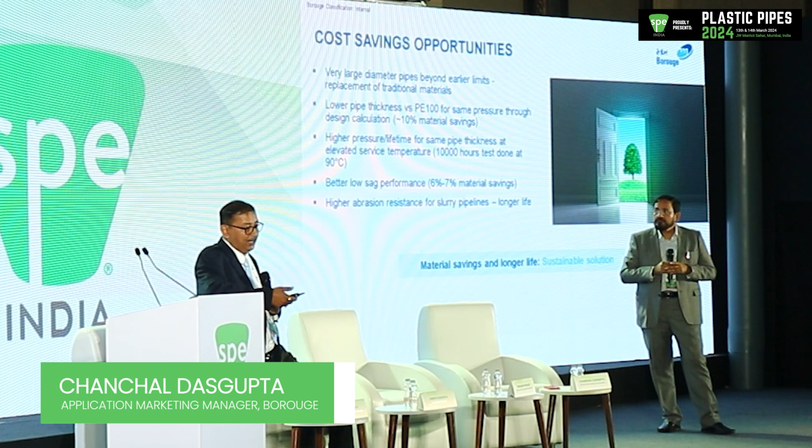So, summarizing the cost saving opportunities: very large diameter pipes beyond earlier limits, replacement of traditional materials, lower pipe thickness versus PE100 for the same pressure through design calculation giving about 10% material savings, higher pressure lifetime for the same pipe thickness at elevated service temperature since we've done 10,000 hour tests even at 90 degrees centigrade meaning higher lifetime, better low sag performance saving 6 to 7% material, and higher abrasion resistance for slurry pipelines giving longer life. So material savings and longer life, meaning a sustainable solution, which is also the theme of this conference.

Thank you very much for your patience. Thank you.

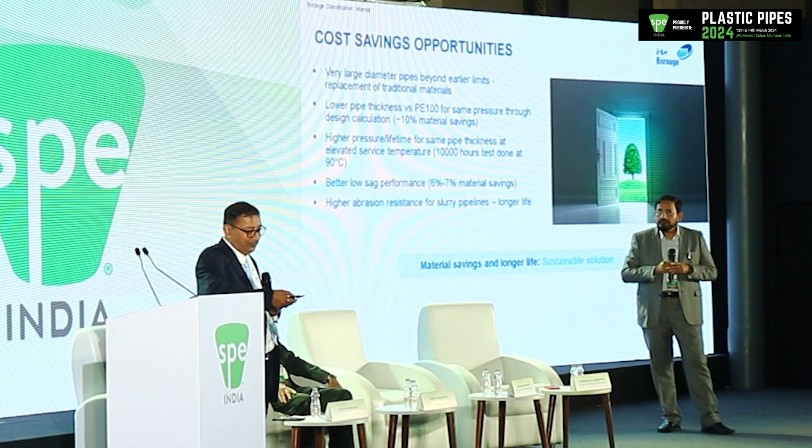Very interesting presentation in tandem. Thank you. Now we would like to invite a couple of questions before we go to the next, the finale of the event. Does anybody have any questions?

Can you please send a mic to Mr. Rajesh? Okay. Your name, please. I'm Vishnuvardhan from HPCL.

This is to the Borouge team. The first question is about the revision in the MFI from 0.2 to 0.15. Is it conditional or without any condition? Because I believe it's a conditional change from 0.2 to 0.15. No, it is very clear in the standard. The lower limit is 0.15, and the condition is that you should be able to maintain that.

So it's not like, probably in many standards, where if MFR varies by 20% that is allowed. Here they said the limit has been fixed to 0.15. So probably for us, the MFR doesn't change that much, and density doesn't change if you're only converting the granules to the pipes. I think that's why they put that clause, because you will not be permitted to add anything and you should not go further below. I'm asking with respect to whether it is conditional with respect to butt welding and electrofusion joints.